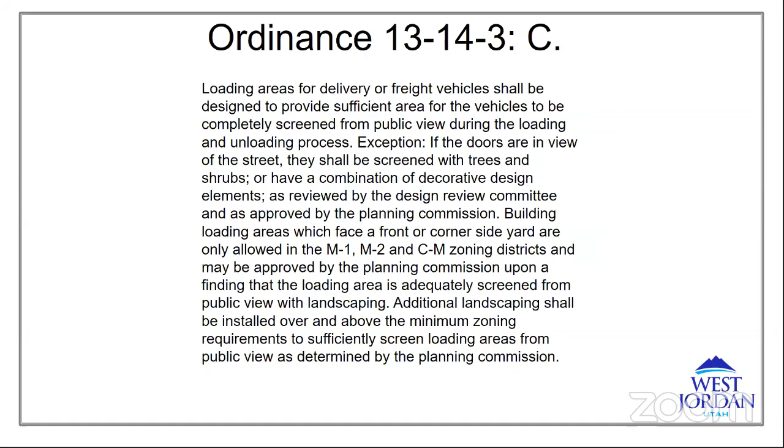So Matt, this is Larry. Can I make one comment? No, I didn't give you any permission on that - go ahead. I think that what the applicant's done meets the intent of the ordinance. The trees are planted small and they have to grow, and so we reasonably logically would assume that they would grow bigger. And so I would not make a finding to deny it based upon the immaturity of a tree.

So that's my comment. Sure, I don't think that would have been a question, but I appreciate the point on that. Anybody have any questions for staff or comments? Jay, I see you took off your mute, so go ahead. I just want to confirm that that is an 8-foot wall.

Ken, did you hear that? No, I did not, sorry. Commissioner Thomas asked if it's an 8-foot wall. Oh, it is 6.

Okay, we only allow 8-foot walls on rear properties abutting an arterial street. This is a collector road. That was going to be my next question.

I was looking at the elevation and it looked like there were 2 different heights on the wall. Is that just an optical illusion, or did one section of the wall appear lower and another higher? On the left, it looks like the wall is lower. Can you clarify that for me?

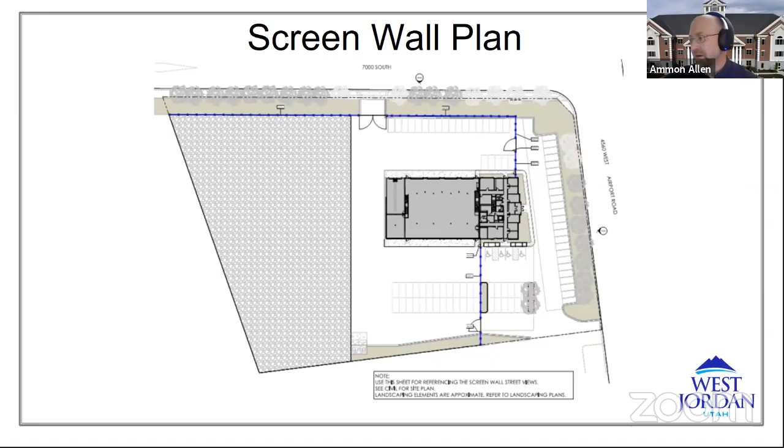I have two last questions. One is from the design review committee—it was noted regarding a sidewalk along 7000 South. The second question has to do with the landscaping. As we're talking about putting in all these trees, and I see some other colors, it doesn't say exactly what these are. Is this going to be water-wise style landscaping throughout?

It is. We'll have rock mulch and a drip system that helps in watering just the plants, and all the plants are obviously water-wise, and there are some nice bushes. So yeah, it's all taking that into account.

Okay, and how about the sidewalk? Can I just interject? I just wanted to say really quickly, I think we're getting a little too far off. If I'm not mistaken, we're only here to discuss the screening.

We talked about the wall and we talked about the trees, right? So while Spencer's comment is interesting to note, I don't think the sidewalk has anything to do with what we're here to talk about tonight. I just want to make sure I'm on the right track with that, Larry, or Duncan. Can one of you confirm that? That's absolutely right—I think we've gone too far into the weeds on this one, and we should just entertain the motion regarding the screening that we've already discussed. Unless anybody has other questions about screening, I don't mean to stop it, but I think we're a little far off track here.

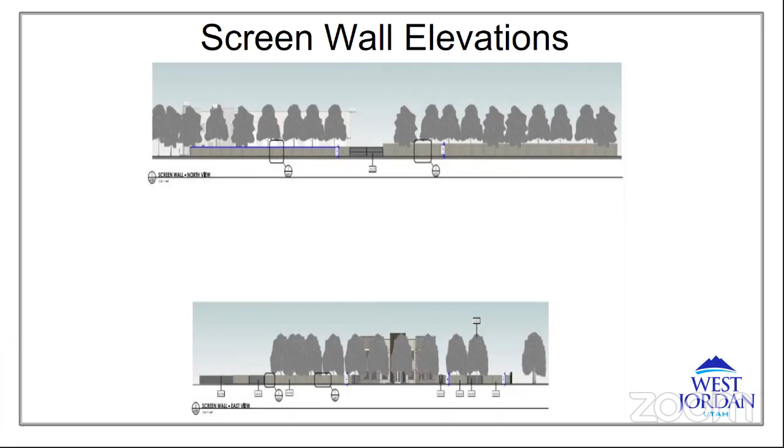Based on the information and findings set forth in this staff report and upon the evidence and explanations received today, I move that the Planning Commission approve the architecture and screening of street-facing bay doors for B. Jackson Condo 2 at 7022 South Airport Road.

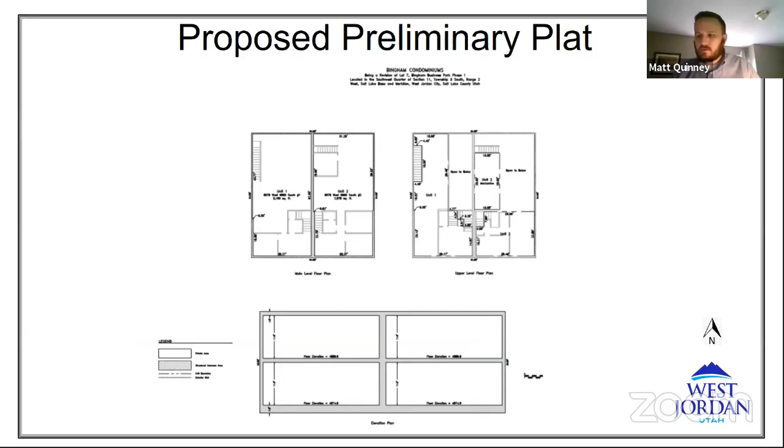Okay, sounds good. Assuming there's no questions for the applicant, we'll turn the time over to Mr. Page to give us the staff version of this, and then we can discuss this. We'll bring the questions back to you, Mr. Barnes, if we have any after the conversation here. Okay, Mr. Page, it's all yours.

Yes, thank you, Chair. So for a subdivision plat, particularly a condominium conversion plat, the ordinance requires that the Planning Commission approve the completed subdivision plat, making sure it complies with all applicable requirements of this code. If the Planning Commission finds that the proposed subdivision plat does not meet the requirements of this code, it shall not approve the application.

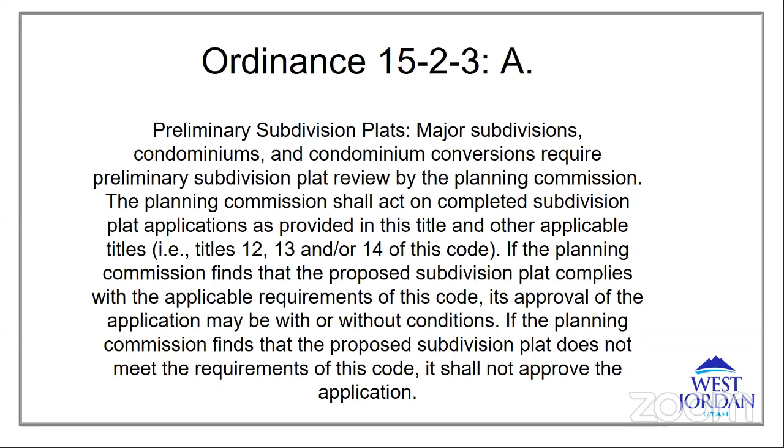The basic requirements for condominium conversion are that the proposed landscaping improvements of the common open space, the intended use of the open space, and enough detail of how the improvements will be financed and the area maintained. It also allows the Planning Commission to place any additional conditions or restrictions to ensure the development and maintenance of the desired character of the subdivision.

And finally, the condo conversion needs to assure that the continuation of common areas will be used in accordance with the plans approved by the Planning Commission. The owner developer shall grant to the city an open space easement on and over the common open space prior to the recording of the final plat, which easement will not give the general public the right to access, but will provide that the common open space remains open.

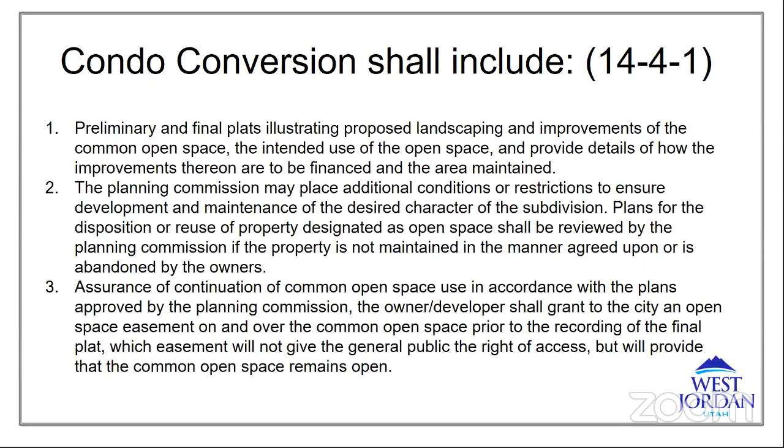In summary, a condominium conversion needs to be subject to state and local codes, and again needs to ensure the maintenance of the common open space. In this case there's relatively little common open space, but it still needs to be addressed in the application.

Specifically, condominium conversion needs to address the conditions of the property, such as its age, structural elements, water and sewer service, paving, parking, and circulation, and all known deficiencies and conditions which may require repair or replacement within 5 years. I guess that's so the would-be owners of the new condominiums are apprised of what condition the property is in and what they can expect to need servicing within 5 years. So that's brought to the forelight for everyone's consideration.

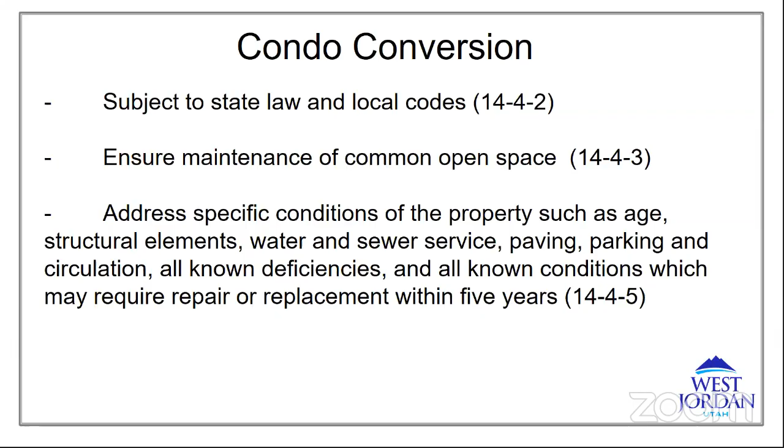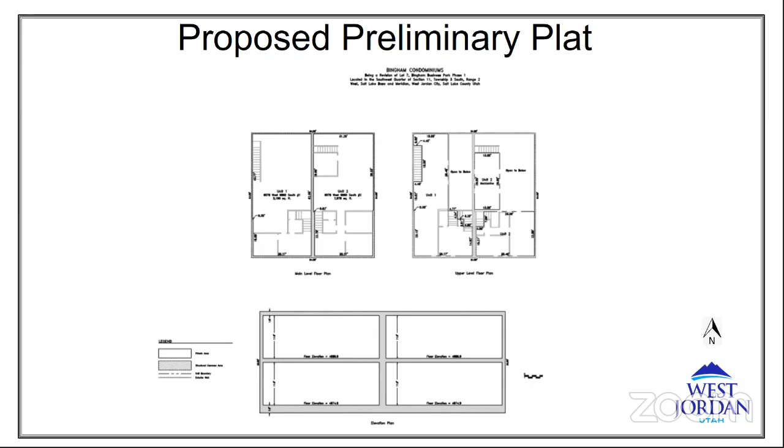But staff suggests there be a little more narrative of how the maintenance of this common area will be handled and what the current conditions of the property are. That's my understanding of how we follow the state code and our own ordinance with the conversion into a condominium. Again, here's the more detailed division of the area to be made into 2 condominiums. I'd be glad to try to answer any questions you might have at this time, and I'm glad Mr. Barnes is here to address any questions as well.

Okay, any questions for staff? Commissioner Thomas: Yes, is there going to be a COA created to incur the costs of the mutual sewer and water lines, and upkeep of the maintenance on the exterior? Maybe Mr. Barnes could answer that question. Okay, yes, there is, and I think it addresses just about every issue that Kent has raised as far as code compliance.

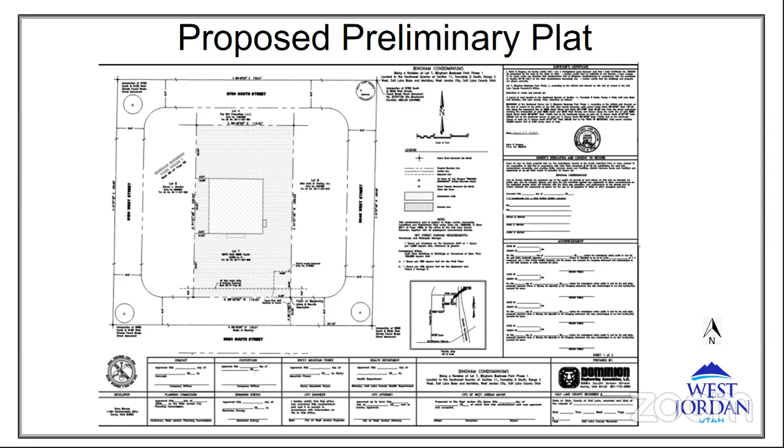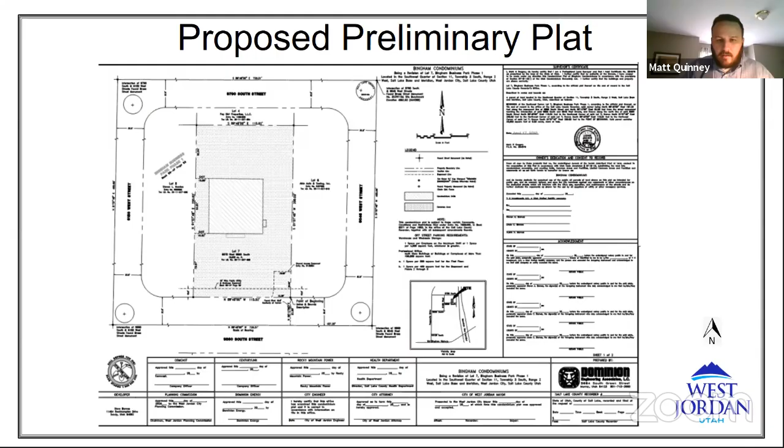Any other questions for staff? Okay, this is our first public hearing, so we will go ahead and open this up to the public. If there's anybody here who wishes to speak on this item, please feel free to raise your hand. Okay, and seeing none, we'll close the public hearing for this item and bring this back to the Planning Commission for any further discussion or a motion.

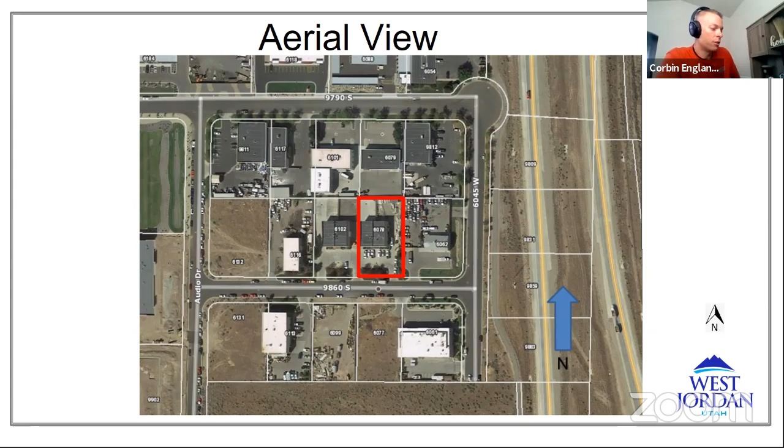I'll make a motion. Based on the information and findings set forth in this staff report and upon the evidence and explanations received today, I move that the Planning Commission approve the preliminary condominium conversion plat and the final conversion plat for Bingham, subject to adherence to all current City of West Jordan code requirements.

Does that suffice, attorney? Yes, that's good. Sounds good, sorry, I had my mute on. That sounds good, all right, perfect. Thank you, I'd second that.

We have a motion by Commissioner England, seconded by Commissioner Shelton. Any discussion to the motion? Seeing none, all those in favor? Aye, aye, aye. Any opposed? Okay, we are unanimous.

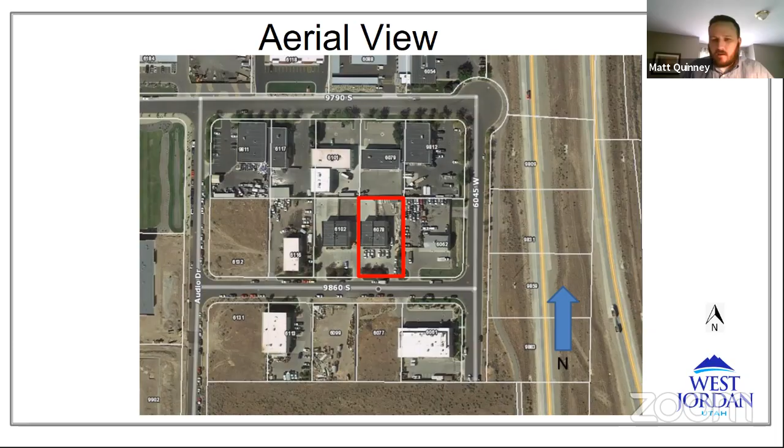Thank you, Mr. Barnes, for coming and presenting to us tonight. Wish you luck in your plans there.

Moving on to our final item here is the West Jordan Engineering Policies and Design Criteria. This is a recommendation to City Council to approve the updated landscape and irrigation policies and design criteria, appendices, and other related provisions with citywide applicability. Obviously, the City of West Jordan is the applicant.

Mr. Nelson, are you here, or were you letting Duncan do this one? I haven't seen him, so I'm assuming it's you, Duncan.

I can do that. So if you remember recently we first put before you a recommendation to the council to reapprove all of the existing engineering guidelines you had at one of your last meetings, and that was just to make sure that everything had gone through the whole process of planning commission, public hearing, to council, which over the last several years has become the way to adopt these kinds of standards through treating them as land use regulations. Now what's happening is systematically, especially the engineering division, is going through different parts of the engineering standards and doing some substantive revisions.

This set of changes deals primarily with landscaping, grass strips, and those kinds of things, parks, but basically it's all city-owned property. I talked a little bit to the parks superintendent to make sure that there were standards for city-owned property and also for property that is scheduled to become city-owned. So if a developer is putting in some grass strips, or maybe a park that becomes dedicated or turned over to the city later, then of course it's built according to city standards when it's initially constructed.